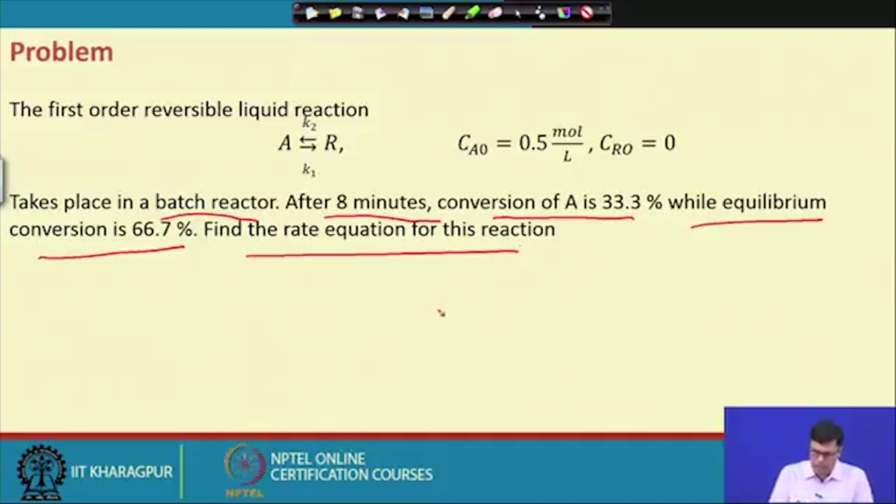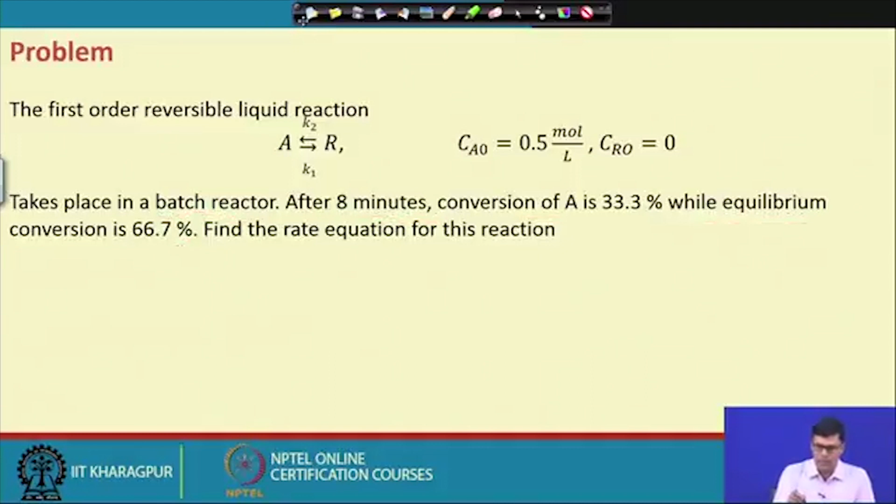So, in the batch process, after 8 minutes the conversion of A is 33.3%, while the equilibrium conversion is 66.7%. Find out the rate equation for this reaction. Now, what is the rate equation for this? For example, the rate of forward reaction we can find out in the next slide.

This rate we can write in terms of rate of substrate degradation or rate of product formation. A is converted to B, with K1 and K2. When you talk about substrate, this is Ca and this is time. Ca always decreases with respect to time, so it is a negative slope, hence negative.

Now, if we consider B, this is Cb, it is a positive slope, so it is positive. So here is positive, here is negative. Now, this is K1 into Ca. K1 into Ca is the rate of forward reaction, and K2 into Cb is the backward reaction.

Now, if you want to write in terms of conversion, suppose we assume that Xa is the conversion. What is Xa? As I told you, Xa is Ca0 minus Ca by Ca0. This is the fraction that is converted. So this is Ca0, and so I can write that

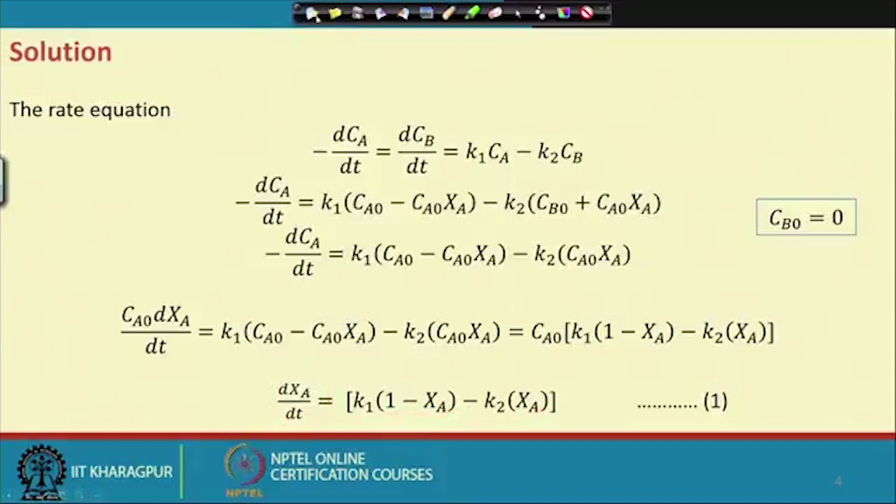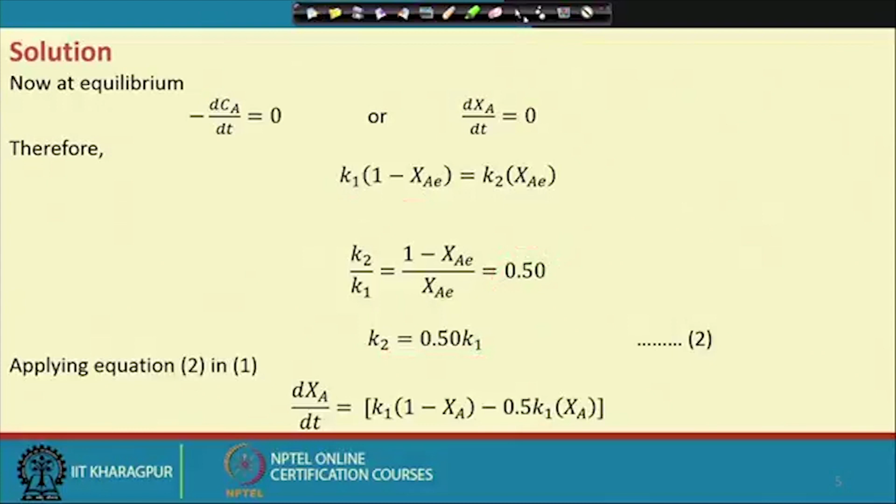This is k1 into (1 minus Xa) equal to k2 into Xa. So, k2 by k1 is equal to 0.5. Then we can write k2 equal to what? 0.5 into k1. Now, this value we can put in the previous equation that I showed you. This k2 value we can put here. Then we can write this equation like this, and finally it will come like this.

Then, in the log form, it is 1 minus this 0.333, because the 8-minute conversion is 33.3%. So, we can write 0.333, and this is minus 1.5, and the k1 value we can easily calculate. We can find out this is equal to 0.057 minutes inverse.

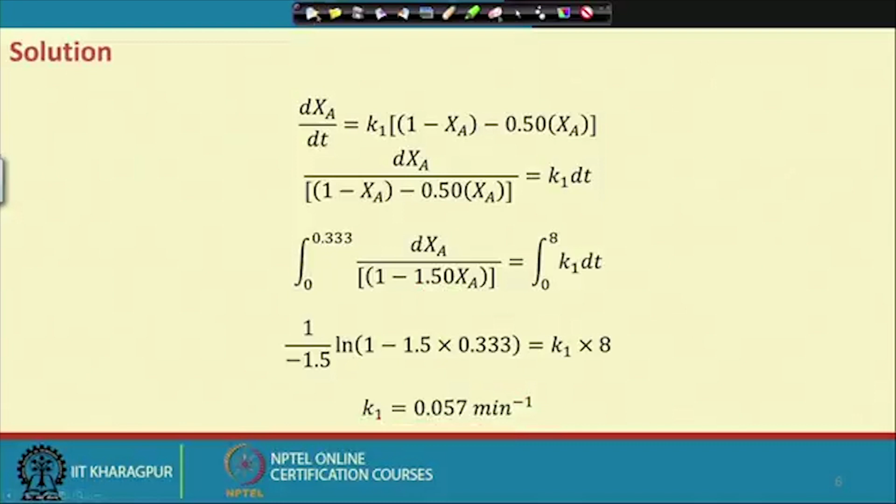Then if you know the k1 value, we can find out the k2 value also. We know the correlation, so we can find out this is 0.5 into this. So, what was our final rate expression in the reversible process? Minus dCA by dt equal to dCB by dt equal to 0.057 minutes inverse into Ca minus 0.0285 minutes inverse into Cb. So, this is the final equation that we have. So, in a reversible reaction, we can find out the rate expression very easily.

Now, let me go to the second problem. The second problem is also very important, and this is also with respect to the batch process, and we have taken different numerical data of a real process we want to analyze. Let us see how we can analyze this process. The problem is that reactant A decomposes in a batch reactor, A to B. The composition of A in the reactor is measured at various times with the results shown in the table. Find out the rate equation to represent the data.

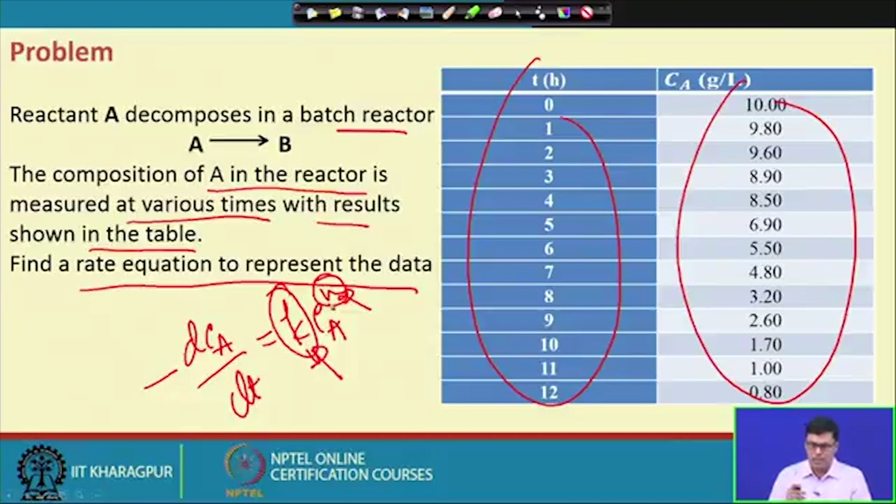I showed you before also how we can do it; I can do it again. This is like this: minus dCA by dt is equal to K1 into CA to the power n. Am I right? We can drop the 1, because this is a single reaction, so we can simply write K. That is good enough.

Now, in this problem we have the t values; at different t values we have the data given. Now, what we can do here is take the log, the natural log: ln of minus dCA by dt equal to ln K plus n ln CA. Am I right?

Now, if we plot ln of minus dCA by dt versus ln CA, we will get a straight line, and the slope will give you the value of n, and the intercept will give you the value of ln K. So, here you have different values given, so you can easily find out what minus dCA by dt is.

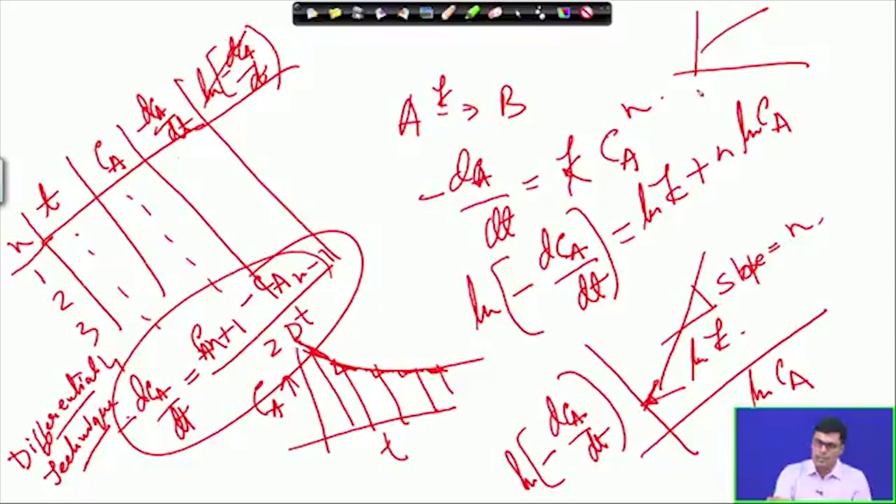Now, once you have this, you can have ln of minus dCA by dt, or if you want to use the data directly, you use log graph paper. Different log graph papers are available. You can put the data directly and get your slope; you don't have to take the log. If your scale is log, you can put the data directly and find the slope, the value of n.

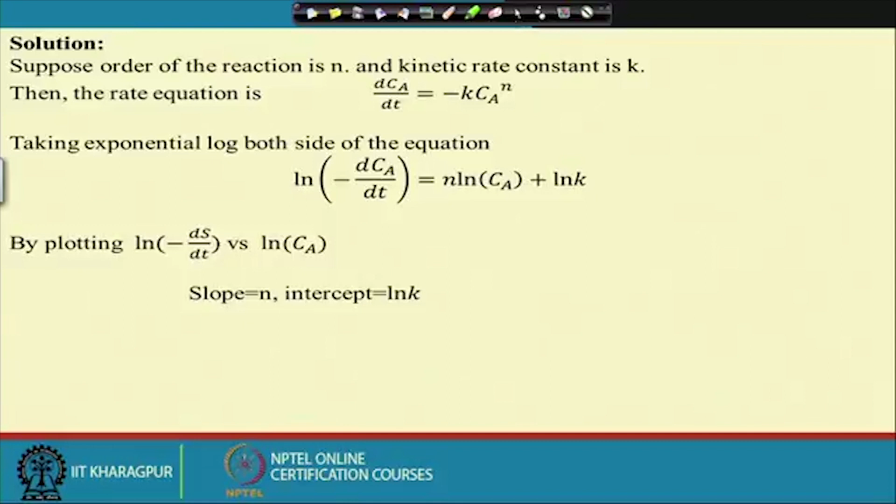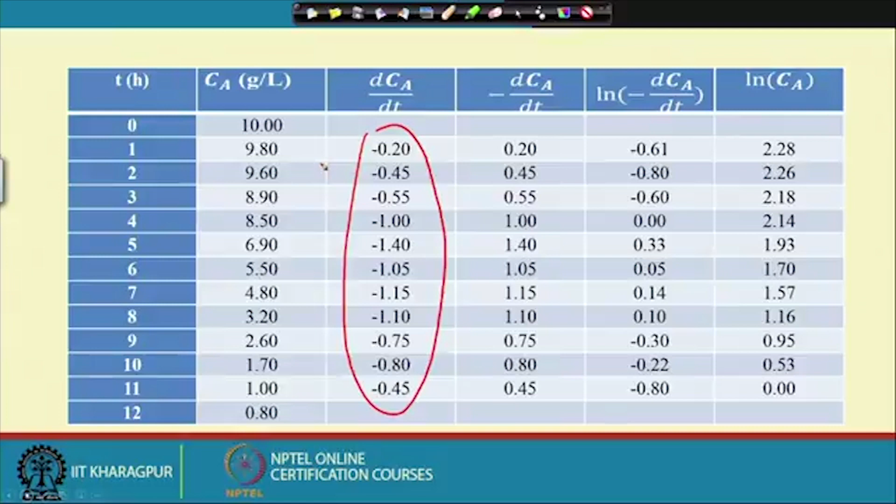Now, this is how you can calculate. So, this is your time and CA that is given, and through the differential technique we can find out the value of dCA by dt. Then we have minus dCA by dt, which is positive, and we can easily take the log value, and ln CA.

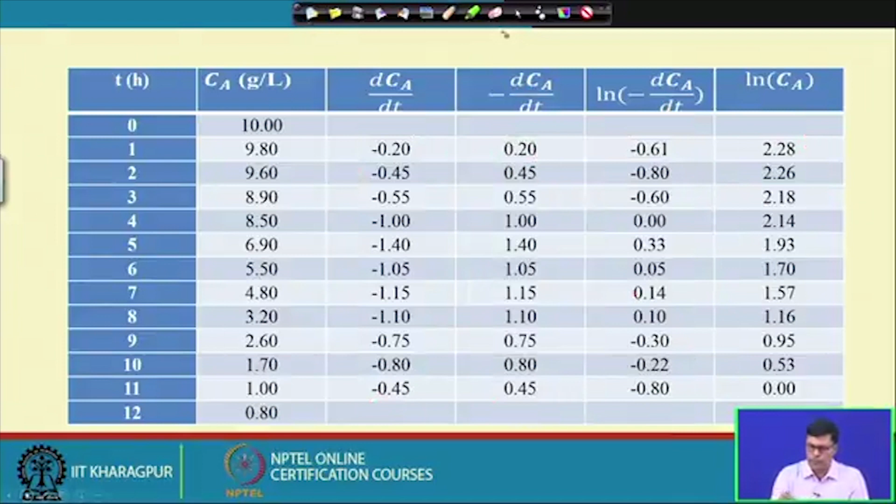In that case, if we have the log values, then you don't have to use log graph paper. Normal graph paper will work. On normal graph paper, what you call centimeter graph paper, you just put the values, and that will give you the slope. Now, this is exactly what we have done. This is the normal graph paper.

You can see this is normal graph paper, and if we plot, we get a straight line, and from the slope we get the n value of 0.41, and from the intercept we get the value of ln k, that is minus 0.6, where k equals 0.55. So, our equation, remember: dCA by dt equals minus 0.55 CA to the power 0.41; the minus was here, we bring it here.

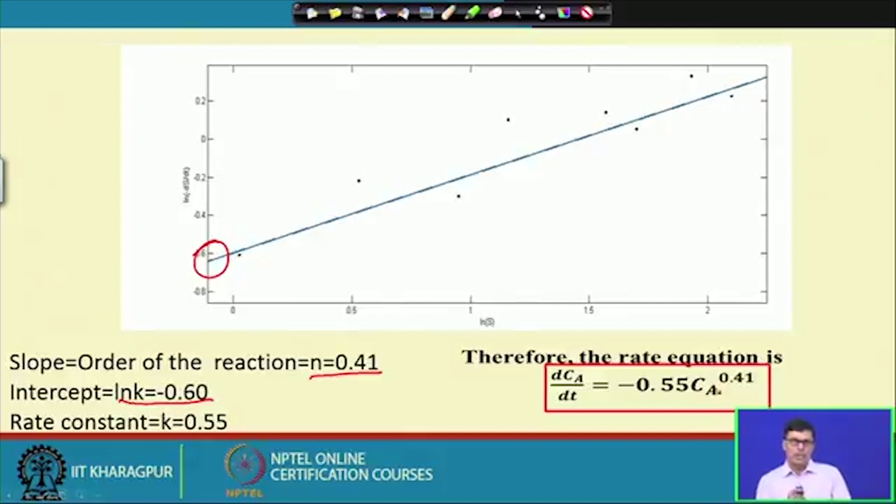So, from the experimental results we can easily find out the rate equation, and I was talking about how once you find this kind of equation, you can do the validation of the equation. Let me show you how you can do the validation of the equation.

That is, suppose in this equation you have found dCA/dt equal to 0.55 CA to the power of some value; let's make it 0.44. Let us assume that. So, what I want to tell you: if you solve this equation, you can find a correlation between CA and t, because you can bring it here, dCA by CA to the power 0.44 equal to 0.55 dt. Am I right?

So, you can solve it and find the correlation between CA and t. Then you can put different values of t in this equation and find the CA value. So you have CA and t. Theoretically you can draw this line like this, because you can take n number of t points, so you can have a very nice plot here.

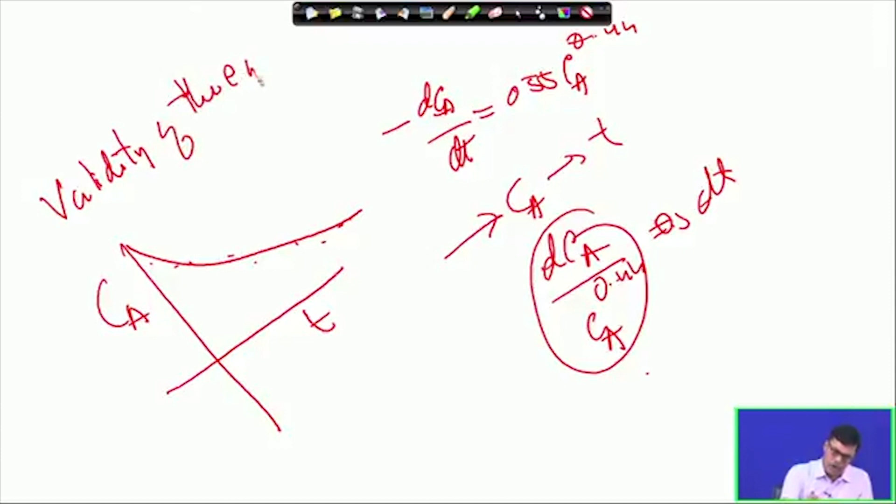Now, you put your experimental data from the table, which might look like this, and then you can find the percentage deviation of the experimental results from the theoretical results. If we find the percentage of deviation is more than 5%, then this is not acceptable; you have to modify the equation. But if it is less than 5%, then it is acceptable. So this is how we check the validity of the equation, which we call simulation.

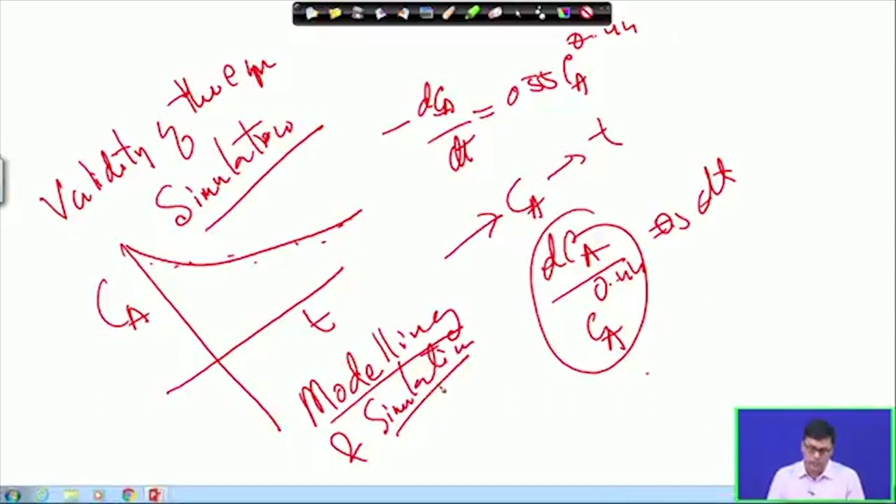So basically, when you write any mathematical equation, we call it modeling. Am I right? We call it modeling and simulation. Modeling deals with the mathematical representation of the process, and simulation deals with the validity of the mathematical equation, how much validity we have as far as the mathematical equation is concerned.

Now, let me go to the next problem. The next problem deals with the pyrolysis process: pyrolysis of ethane proceeds with an activation energy of about 300 kilojoules per mole. Here I want to point out that in the last lecture we calculated the activation energy of a particular process, what we call the pasteurization process. Now, here the problem is a little bit different.

Here the activation energy is given, and we have to find out how much faster the decomposition is if we increase the temperature to 650 degrees centigrade from 500 degrees centigrade. So this problem deals with how the rate of decomposition increases if we increase the temperature from 500 to 650 degrees centigrade.

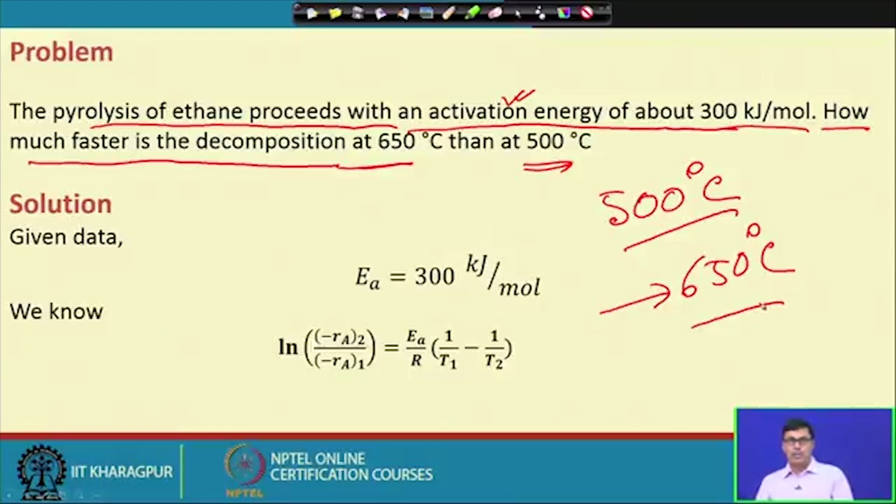I hope you know what the pyrolysis process is. It is a kind of process where we burn the material in a limited amount of oxygen. The incineration process means we give sufficient oxygen for the burning of the material. But in the pyrolysis process, we give a restricted amount of oxygen or air. So our product here is mostly carbonaceous material, carbon, and some liquid formation, bio-oil formation, takes place.

Now, this problem deals with how we can find out, if we increase the temperature, how many fold the rate of reaction increases. So again, I have to go to the Arrhenius equation. The Arrhenius equation is K equal to A e to the power minus Ea by RT. This is the equation that we have.

Now, in the rate equation, we know that rate equal to minus rA equal to K into CA. So K is proportional to rA, and we can replace this with the rA value. We have already shown you how this equation has been derived at different temperatures. So, let us see how this equation has been derived.

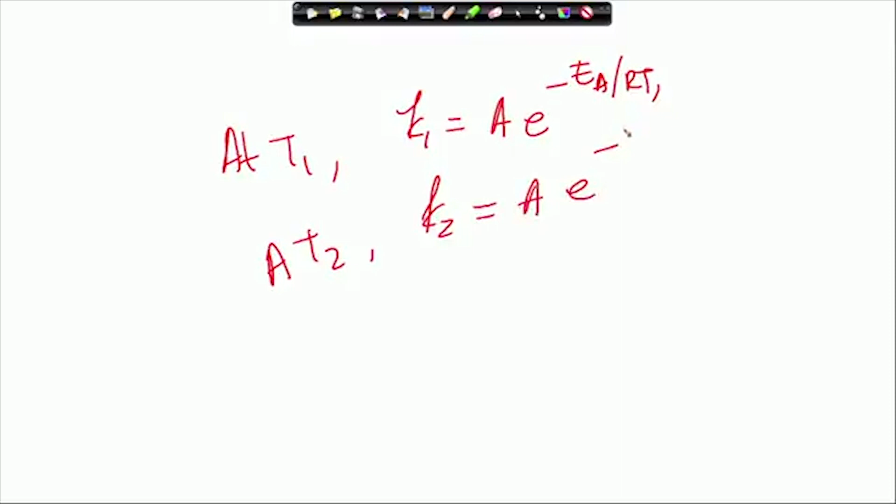Suppose at T1 we have K1 equal to A e to the power minus Ea by RT1. Am I right? At T2 we have K2 equal to A e to the power minus Ea by RT2. Am I right? So we can write K2 by K1 equal to A e to the power minus Ea by RT2 divided by A e to the power minus Ea by RT1. So the A will cancel, and I can write this in terms of r2 and r1.

So, if we take log, this will be what? ln of minus R 2 by minus R 1 is equal to E A by R into 1 by T 1 minus 1 by T 2. So, in this problem, what we have? We shall have to find out, or here I can put this value, because we shall have to find what fold the rate of reaction increases.

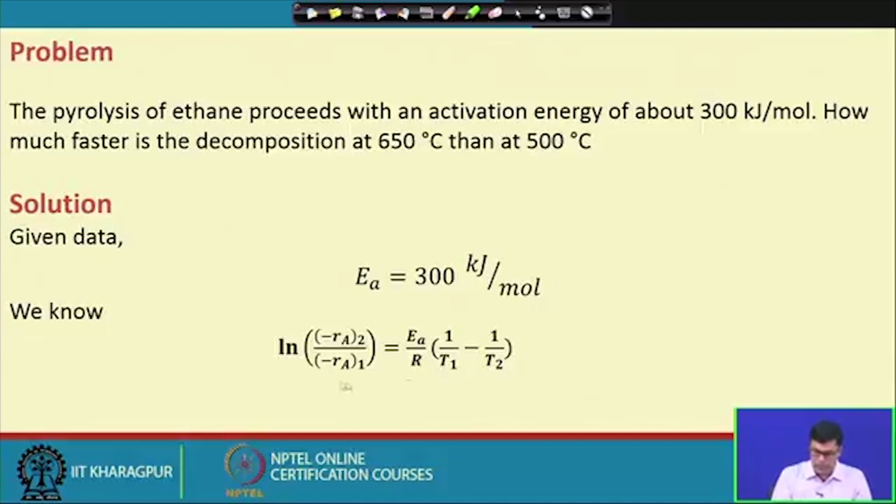So, this equation I showed you how it has come, and then this is this ln by this. If you put the values, you will get the final equation like this, and this is coming like this. So, it indicates the rate of that reaction at 650 degree centigrade, this is 650 degree centigrade, and this is 500 degree centigrade.

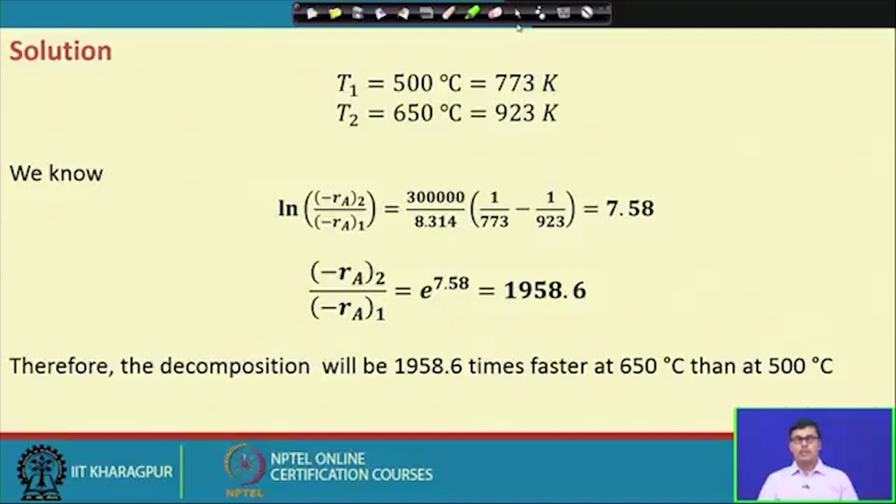So, if you look at the difference, as compared to the 500 degree centigrade, at 650 degree centigrade the rate of reaction will be 1958.6 fold. So, this is a very interesting thing, that we can find out by increasing temperature what is the percentage enhancement of the rate of reaction that takes place.

In this particular lecture, we tried to discuss some kind of reversible reaction. For the reversible reaction, initially under equilibrium conditions, rate of forward reaction equals rate of backward reaction, and in that condition we know the concentration, because 66.7% of substrate is converted. So, we can easily find out that Kc is nothing but concentration of product divided by concentration of substrate, which is equal to K2 by K1.

So, we can find out the relationship between K2 and K1, and then put the value in our reversible reaction. Then we can solve this equation and find out the value of K1. Once you know K1, we can calculate K2, then we can write the rate expression. And I showed you how we can do the simulation of this equation, because whenever we write any mathematical model, we shall have to validate it. We shall have to compare with the experimental results and find out the percentage deviation.

If the deviation is less than 5%, it is acceptable. If it is more than 5%, we shall have to modify this equation. Then we discussed another problem of irreversible reaction, where we tried to find out experimentally how we can determine the value of rate constants and the order of reaction. And then finally, we discussed one pyrolysis process.